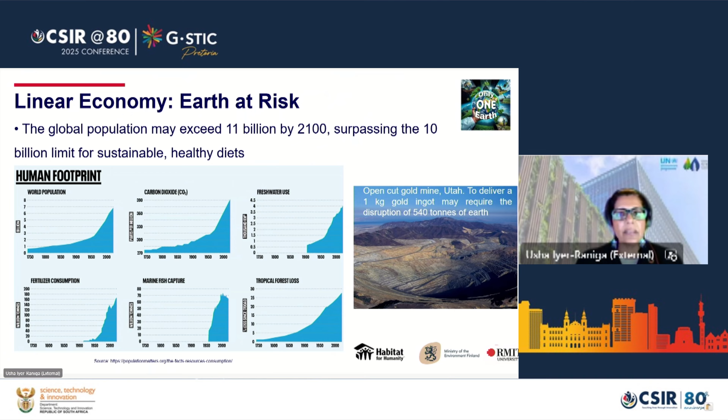So moving along, as I said, we are living well beyond the means of our planet, and we know already that from about 1970, we have crossed the limit of the sufficiency of the one planet, and at least here in the Australian context, we go through this overshoot day around the middle of the year.

We need to start thinking about how the whole world is going to be able to live in a just manner, with equity across the world. It's not possible for us to continue to live in the same lifestyles that Australians do, which is looking for about 7 planets, and that's just simply not possible.

There's a little bit of work going on in terms of how some of that waste could be reused. We call that the recycling economy, but truly in a circular economy, there is no such thing as waste. We continue to use resources over and over and over again. And there are other ways in which that could be expressed.

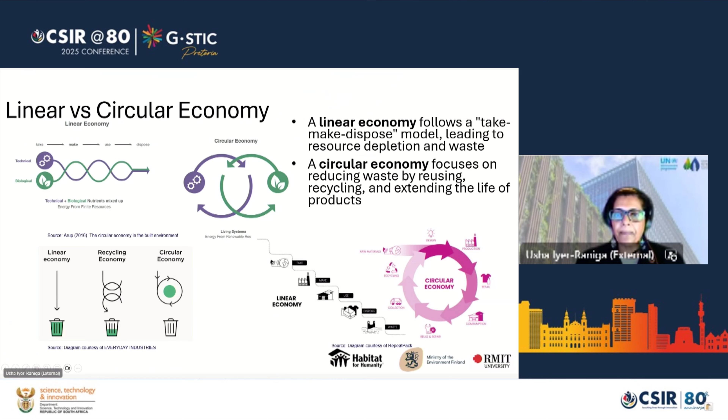The most common definition, or the most popular understanding, like the Brundtland definition of sustainability, is the one by the Ellen MacArthur Foundation called the butterfly diagram, which demonstrates on the left-hand side, in the green, the biological cycle, and on the right-hand side, the technical cycle.

As it is in nature, biological cycles can be continuously used, and it allows the planet to regenerate. Whereas with the technical cycle, that is not possible over a short period of time. You're looking at hundreds and hundreds of years for technical cycles to be able to regenerate on the planet.

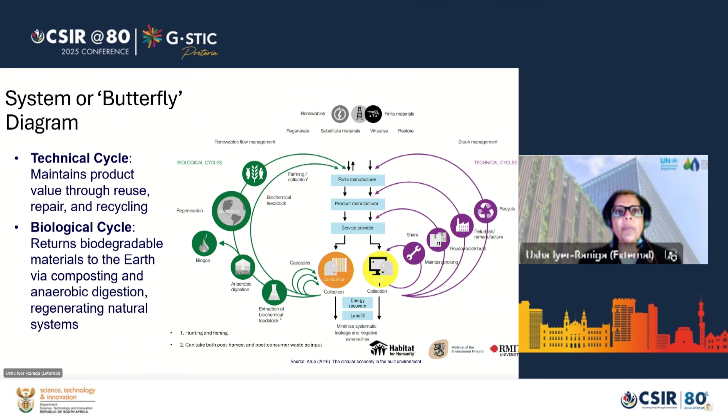And that, again, is from the perspective of the fact that we have already overshot our use of resources on the planet, and with an increasing population, this is simply just not possible in the near future.

What is really critical to understand is, unlike sustainability, where the environmental movement drove the solutions, and the economic aspect came in much later, and the social even later than that, in the case of the circular economy, it's unashamedly looking at how we can allow the planet to regenerate while bringing in solutions that also provide economic incentives, with economy as the basis for making these decisions.

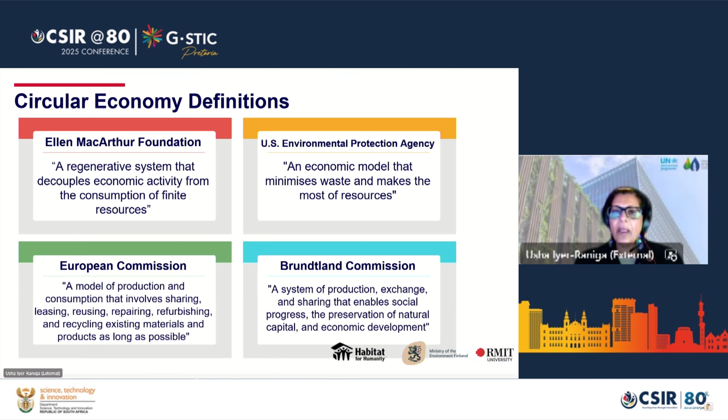So what are some of the themes we need to consider when we start talking about the circular economy? Some of these themes include the importance of the design perspective, because we need to create systems so that we don't have waste anymore.

That will allow the earth to regenerate, particularly if we start thinking about more bio-based materials and bio-based products. We need to think about how we optimize resources, how we can make things more efficient, what these inputs are, where we get them, and where these outputs actually end up. How do we maintain utility for systems? It's about shifting from just the cost of a product into its value, and cultivating a repair movement so products can last much longer, while ensuring we bring renewable energy into the mix.

So from my perspective, the circular economy is actually a subset of sustainability. It sits very much as part of sustainability within the economic lens of how we can reach triple bottom line sustainability.

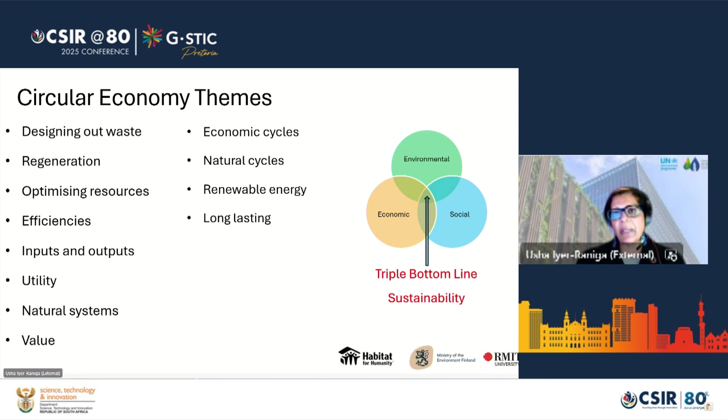So thinking about the design of products, and how we make things last longer - think about your phones or laptops or anything you might be buying. We've now moved into a linear economy where we buy things, and when they don't work, we throw them away. In some countries, certainly in Africa, parts of Asia, Latin America, the throwaway culture is not yet prevalent, but we're heading there, as people across the world want to live the same lifestyle as Americans and Australians, cultivating more of that throwaway culture.

So we need to think about what we use to make these products, and how we make them with more use of renewable energy. Instead of owning products, can we start thinking about a product-as-a-service model? Uber, for example, is a good model of this - you don't own a car, but you want to be mobile, so you use Uber as a service to move from one place to another. In the same way, thinking about the use of products, we can extend their lifetimes to reduce pollution, and so on.

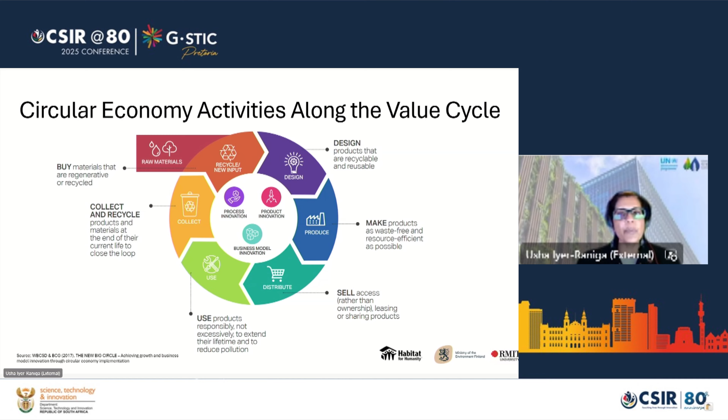So now thinking about it from a built environment perspective, which is really the focus of my talk - how does that resonate within the built environment, and how do we look at buildings from that circular perspective? There are a number of different definitions of what a circular building is, but really what a circular building does is look at how we can optimize resources throughout the life cycle of a building.

So again, the design of the building becomes really critical. As you can see on the right-hand side in the purple, light blue and blue, we need to start thinking about materiality, and how we use these materials for as long as possible - once buildings are built, how do we ensure they stay for much longer? How do we change the function of buildings, and retain them for different uses over time? How can buildings actually become material banks?

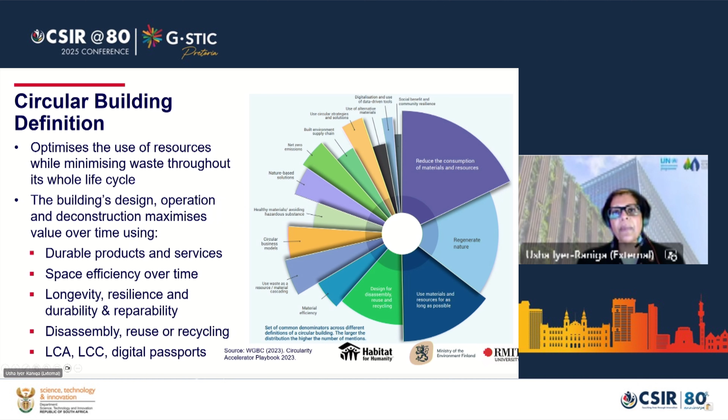How do we use spaces more efficiently within buildings? And if these buildings become material banks in the future, how can they equally be deconstructed, not just constructed? What are the tools that can help us along this journey - things like material passports or digital passports within buildings?

So what are those principles that we use in the built environment? Essentially, there are three, and it doesn't matter whether it's the built environment or anything else we're thinking about from a circular perspective: we want to conserve resources and increase efficiency as much as possible, we want to design so we eliminate waste completely, and we retain value as much as we can. There are different ways in which this can be done.

For instance, you minimize the use of virgin materials, you use more of the materials that are already in the marketplace. You try and ensure that the types of materials used in buildings are bio-based, such as bamboo, mud brick, and clay bricks. These are some of the materials that can be used.

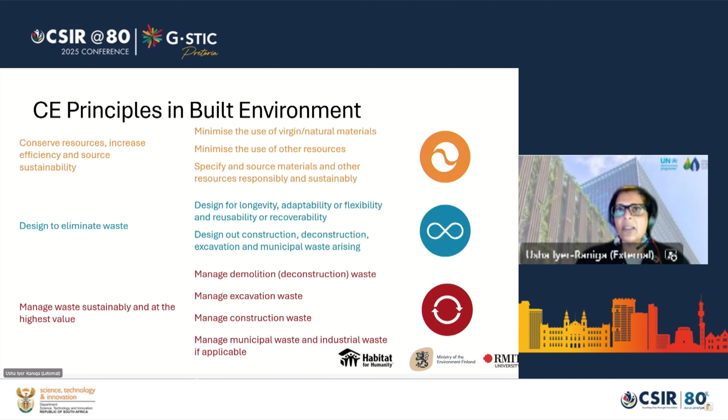How do we ensure that they remain in the building for a much longer period of time? And how do we ensure that we don't demolish buildings, but actually deconstruct them? Because if we demolish it, we're crushing it, and we're not able to reuse those materials again. So how do we manage construction waste? Peppered within all of this are things associated with policy, regulation, standards, and certification.

So when we talk about circularity, in that context of circularity and sustainability, we often also talk about net zero. So what does net zero actually mean in the context of the built environment?

Without going into too much detail, I want you to focus on the left-hand side, which is looking at whole life carbon. Whole life carbon includes the operational carbon as well as the embodied carbon. And in order to be able to reduce this embodied carbon, on the extreme right-hand side of this graph, you want to try and reduce the amount of embodied carbon in the building.

That's what we're trying to do in this line here, where you've got reduced embodied carbon. And you want to try and compensate as much as possible in terms of the operational carbon by other ways, such as using renewable energy in buildings or creating net positive value in buildings as much as possible.

So you actually move - and this is really where we are at now - building codes and standards have moved into energy efficiency, but moving beyond energy efficiency into nearly net zero, so that if you cannot produce that energy on site, you can actually draw that energy in from other places.

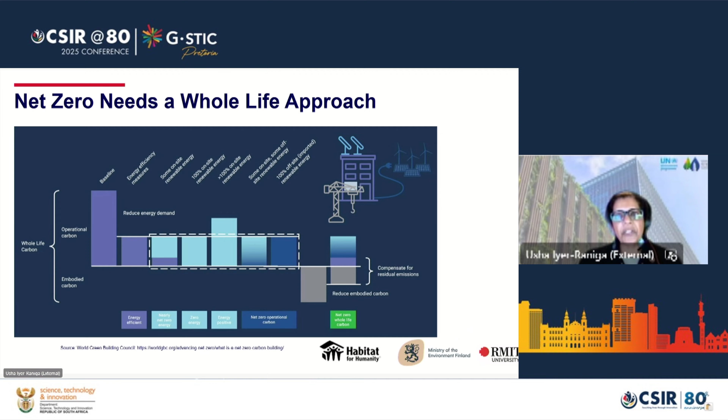But if you're producing more energy on site, you can actually sell that off or give it to other places. So the end game is really getting to net zero in terms of both operational carbon as well as embodied carbon. And things like offsets, etc., also come into the picture.

It's also important to think about who are the different players when we talk about the built environment. In the work I've been doing with the Materials Hub of the Global Alliance for Buildings and Construction, we have been looking at a range of different players: RMIT University, myself, the Ministry of Environment Finland, hosted by United Nations Environment Programme. We've also got NGOs such as Habitat for Humanity involved.

What we have been doing is looking at the work we have been doing since 2015 to 2022 in the One Planet Network's Sustainable Buildings and Construction Program, where we were the first global agency that looked at circularity in the buildings and construction sector.

We developed a number of reports. We mapped the state of play against the Sustainable Development Goals. And you can see on the right-hand side that we looked at things like the regulatory and the policy incentives.

Who are the commissioning agents that need to get involved, what is the role of the logistics operators - the people that transport and procure goods and services - and how do we ensure continuing education across all the parties involved, from planning, the people in the property market, the financing parties, as well as ensuring the client is well aware and puts circularity and sustainability central to their brief.

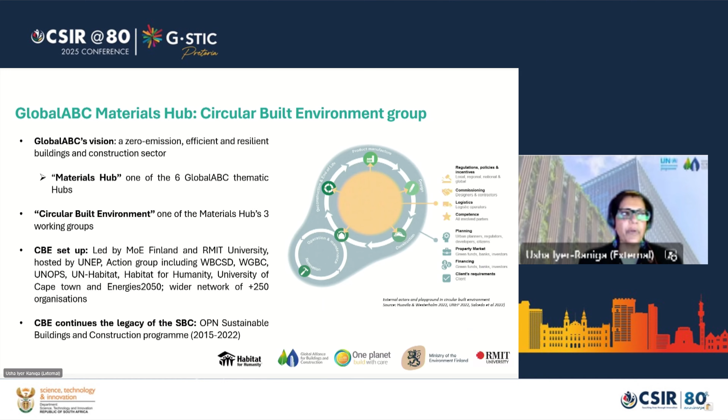The work we have been doing in the circular built environment work has continued since 2023. In a minute, I'll talk about some of the activities we have been doing, but essentially our role has been to try and increase awareness and buy-in.

And we do this in a number of different ways. We do webinars, we run events at the World Circular Economy Forum, we make presentations at the Conference of Parties meeting, we have been working on building capacities, and particularly the work I have been doing has been looking at and being part of an academic and research institution.

Building capacities is a very important aspect that I bring into the work I do with the Global Alliance, as well as informing technical work, the policy work, and the market work.

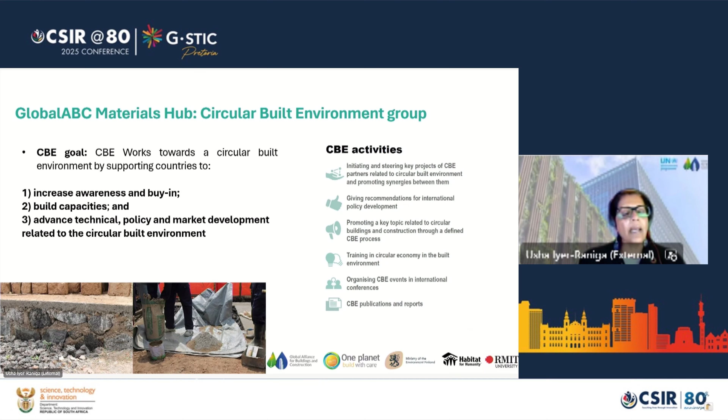So on the right-hand side, you can see examples of some of the activities and some of the areas that we have been working in to date.

Just very quickly, over the 24-25 period, we have been working very closely with some of the UN agencies, such as UNEP and UNOPS and UN Habitat, particularly UN Habitat that has been looking at affordable housing. We have been working very closely with the One Planet Network's Sustainable Procurement Program, because procurement is a very important aspect of the work that we do, and we recognize that.

I don't have a lot of time left, so I'm going to just focus on a couple of things and leave it there and perhaps pick up some more during the question and answer session.

But I just wanted to very quickly mention from a global policy perspective, we have had a very close role with the Buildings Breakthrough. So the Buildings Breakthrough agenda actually came up at COP26 in Glasgow, where the role of the built environment was recognized as being very critical to decarbonize.

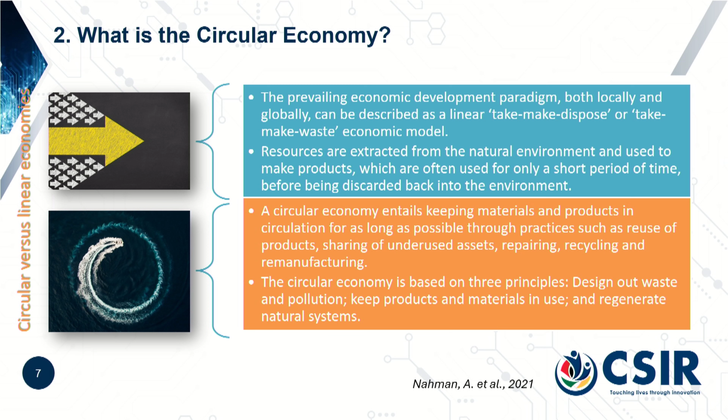I won't go through the definitions again, but the linear versus the circular economy - I am going to come back and challenge a little bit of how practical that is, but it's certainly the base and the thinking that we were working off. And I think our first speaker this morning already did a wonderful set of definitions and depth in the definitions that were presented just now.

So there's a great aspiration towards smart cities, smart African cities, technology solutions, and there is an overlap between the thinking, but they don't always pull in the same direction. The smart cities movement and aspiration doesn't always pull in the same direction as the circular economy, or circular city, type of thinking.

And we've done a lot of work in both areas, and I think we need to be pulling these things together around, and also more productive cities, inclusive cities - we're all trying to achieve various things. They don't always add up, but we need to be speaking to each other about what is a functional, equitable, just urban system within a very rapidly urbanizing continent. And that's at the base of a lot of what we're talking about here.

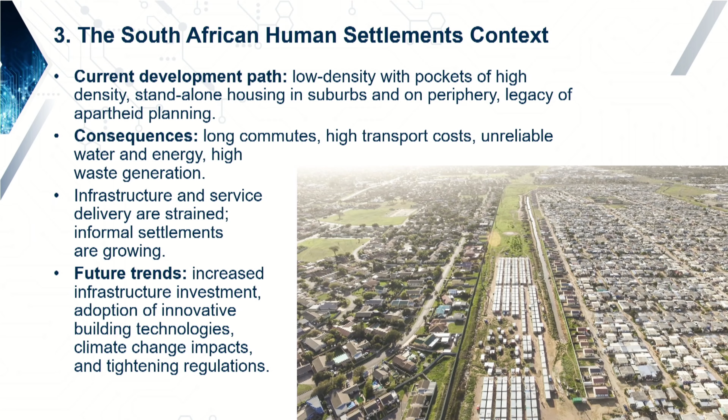But we need to look at these much more systemic and fundamental changes in both the urban form and in the incentives to change the urban form, but also in the infrastructure and the technologies that will help us build more functional and resilient and less wasteful settlements and cities.

So what we did first is we just looked at some of the typical, and I think there was a slide in the previous presentation as well, but these were some of the typical human settlement related interventions that you can look at to make a difference. So we started off with 17 in the group that we were working.

The ones with little asterisks are the ones that we then chose to take further. So things like the 15-minute neighborhood, design for disassembly, etc. You can read them on the screen. There's a lot of different possible circular economy interventions that can make a difference at different scales.

The last one, hadn't come across virtualization. That's a kind of a fancy word for just having sensors on site that allow you to monitor what's going on without having to always be there on site. But it's also sort of the smart sensors and digitalization side of things, if I'm understanding it correctly.

And you can see roof garden. So Jeremy, the first author, the late Jeremy Gibberd, he, as an architect, has tried to design and build and has built roof gardens in different parts of the world.

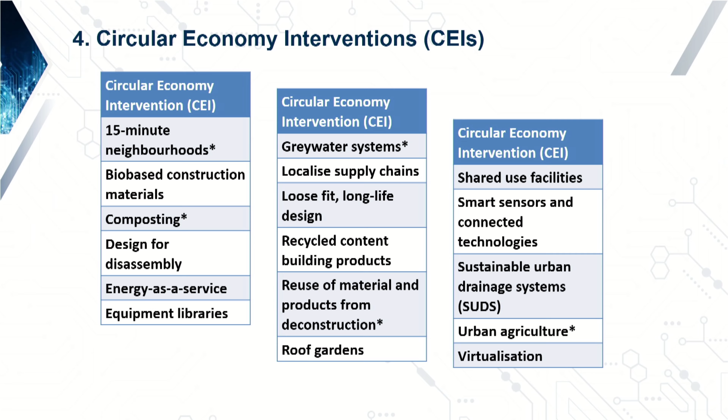The first problem as an architect is that your client says, but your roof is leaking. It's incredibly difficult, especially in a climate where there is torrential rain and even not just drizzle, but anything beyond drizzle, and also very harsh sunlight. And then what you're basically doing is you're putting a swimming pool on the top of every building.

So there were quite a few non-starters that we came up with, both from our experience, but we also chose ones which we thought could work and also that we had data for, and that we could go into this modeling exercise that I'll mention now.

So then the next stage, I won't go through this in detail, was just to have a survey and a set of focus groups with South African professionals and officials around who was familiar with some of these interventions, what did people think about which ones would work, which ones did people think that we had started in the country.

You'll see on that last line, the least familiar in people's minds locally was what is meant by loose fit, long life design. Equipment libraries were fairly unfamiliar to people. Design for disassembly was also not that familiar. So, there's a lot of these ideas that are well developed in certain societies, which are not that common here. And that's a good starting point, I think, for understanding where the opportunities are.

Right, so then what we did is we took those 5 and we did a whole modeling exercise: the 15-minute city, urban agriculture, composting, grey water, rainwater use, and reuse of building waste for reconstruction. And the modeling group that was in the author group used a lot of data, especially from the city of Johannesburg, to do an exercise. And there's a whole appendix to this paper which unpacks each of these and how they were modeled.

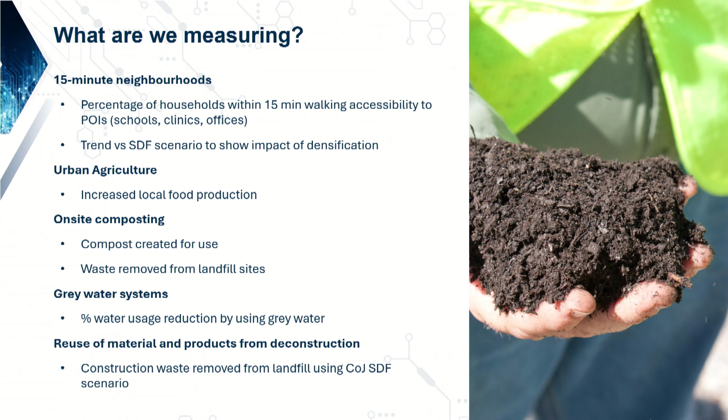So very quickly, the findings which are written up. This was taken through to 2042, is that you could make a difference to the number of households in Joburg, which was 1.84 million households. You would make a bit of a difference at the moment if the spatial development framework of the city of Johannesburg, which is quite progressive, was actually put into practice, with strong elements of densification and provision of different facilities. You could make a difference in the lives of 100,000 households, but if you extended that to a 30-minute neighborhood, then it's 300,000 households, which is significant. There's a bit of change there.

What I would argue from some of our previous research is that a lot of township neighborhoods, historical townships as we would refer to them, is already walkable. Every third household that we surveyed in Mamelodi is a home-based enterprise. You've got spaza shops, traditional healers, hair salons, car mechanics. So when we talk about the formal walkable city, we talk about land use and official zoning, which definitely has to change. But informally, there's a lot of facilities already embedded within communities.

Urban agriculture, we could feed 20% of Gauteng's population using all the open space. The downside is you'd have to use a lot of your grasslands and forest lands to do that. So where on the one side you might be able to produce 20% within a very urban space, you've got to look at how you do that.

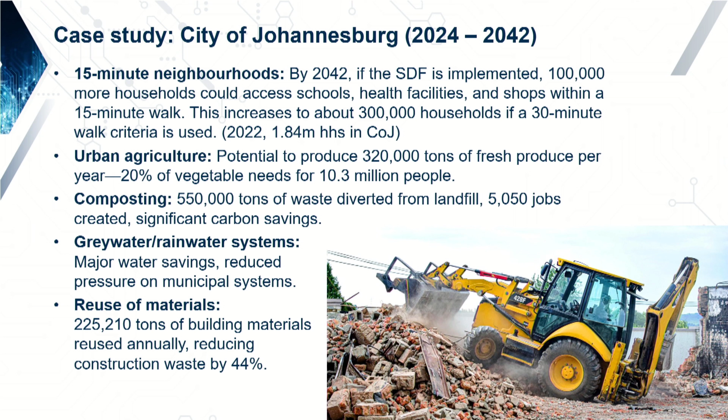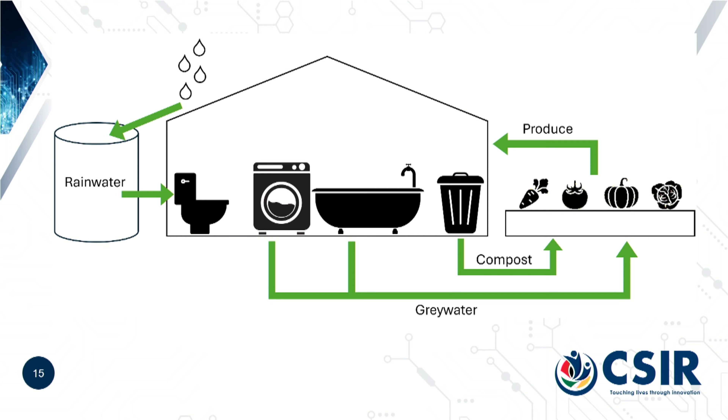Anyway, let me start to just finish off, but that would be just a typical sort of plot-based set of recycling and circularity. But as people like Coralie will tell you, some of these things are done more efficiently at a level up. Groups of households being able to do this at more than just one household level, and also then using some of the surrounding open spaces.

Right, so now coming to beyond the paper, the critique in my mind. Well, this was in my mind, and then I put in a very clever prompt to ChatGPT, and ChatGPT gave me much more eloquent ways of saying this. So circular economy thinking can be seen as techno-optimistic. If we put this technology solution in, it will make all this difference. And in our modeling, because it was on paper, we had to be optimistic about the kinds of scale of change it could make. So it was an exercise. It didn't mean we were saying this could be done, or how difficult or easy it would be to do it. So I think that's one thing.

It can fall into this displacement and scale challenges. If you make advances in one sort of spatial area, you might be displacing that to another area, and then the net gain may not be quite what you're looking for. I think we're all familiar with this kind of critique.

Sociocultural dimensions, I mentioned, for instance, the use of grey water. Certainly composting toilets is acceptable in certain parts of the country and not in other parts. So again, those sociocultural dimensions are very important to consider. And then underestimating the political economy, the existing vested interests. Try and change the cement industry quickly, or the clay brick industry, fired brick industry. We were talking about this in 1985 when I was a student.

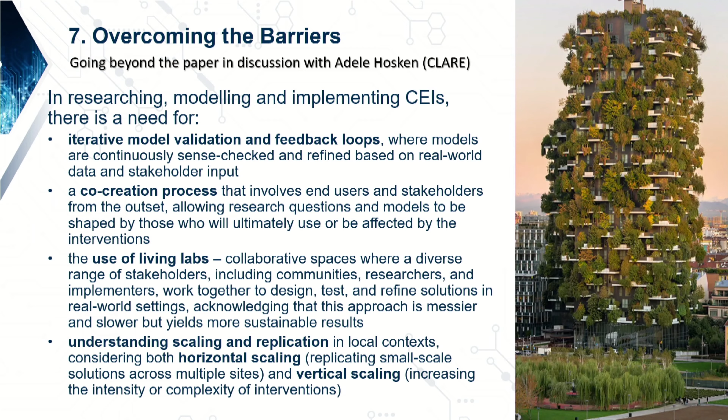So you don't get right to the end of the project with an informal settlement grey water project where people use their grey water into an open channel down to a tree. And as soon as you start building it, the community, this is what happened in Cape Town, says, no, we can't do that. You start that much earlier. I'm just using this as an example. I know it's contested, but these are some of the considerations.

Living labs, where again you put the stakeholders together to actually experiment. And then especially understanding scaling. So we tend to look at horizontal scale, but you can also look at the vertical scale either physically or in terms of densities. So vertical urban agriculture, not just horizontal agriculture.

And I think that's it. I'm not going to go through, we had recommendations. They're not too important, but basically let's look at all of these things in more detail. We think it can make a difference to human settlements in the country. And then we do pose the question, informal settlements are seen as visible examples of where the challenges are, but actually it's often about the underlying rights to land and the right to adequate housing that can keep on driving this pattern. I'm going to just end with that one.

We just started or launched a G-STIC product, which is an online repository of alternative technologies. So a lot of these things you'll find on that site. It's brand new, so there's not a lot there. So if you have any circular economy technologies, please upload them on the site. Thank you.

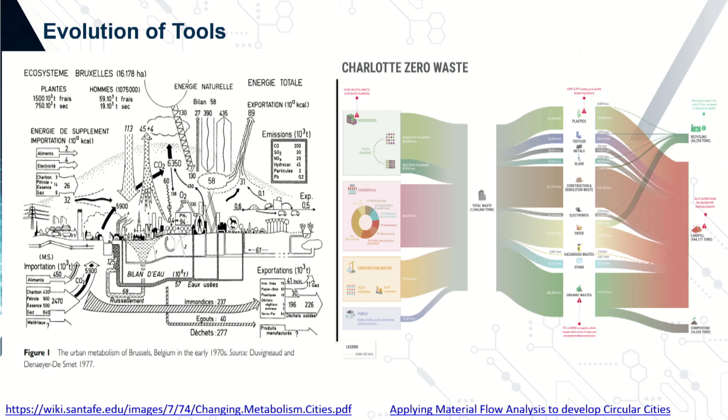Perhaps important to mention at this stage is that this is a result of a material flow analysis. It's termed a Sankey diagram, and what a Sankey diagram is, the width of an arrow or a flow is indicative of the quantity of the flow flowing through that particular stream - sorry, lots of flows there.

This is what came out from a study related to Cape Town, and this is a comparative graph that came at the end of it. What is important to note here is, despite Cape Town being a harbor city, it contrasts actually in the order of 2 to 3 times difference between Cape Town and Paris, and you can see this in the imports and exports. And then if we look at DMC, you can see that the contrast is actually even greater.

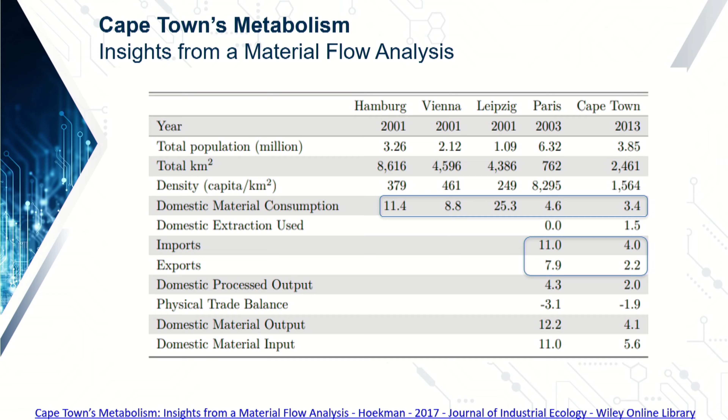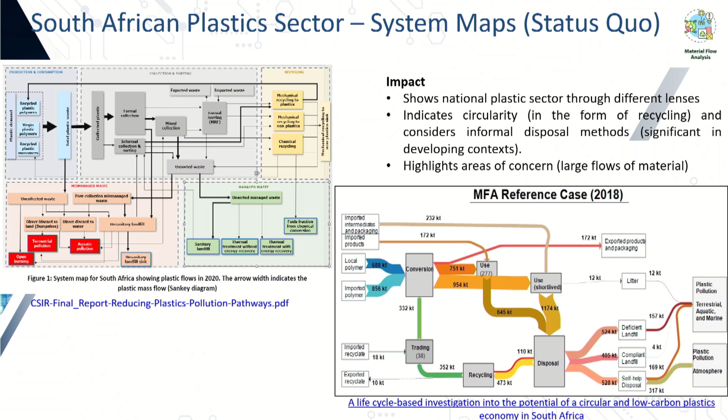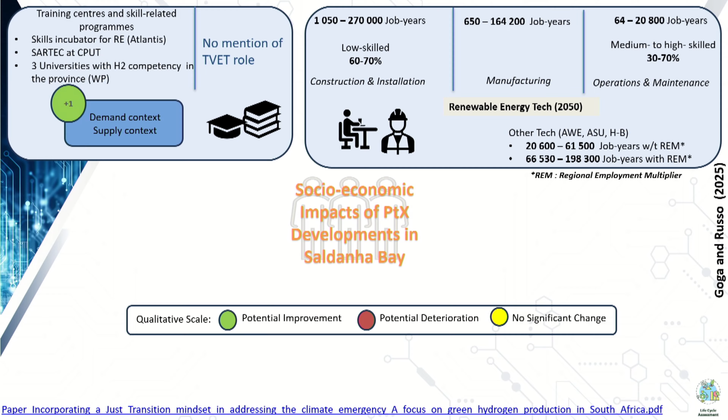On the jobs aspect, there are quite a few numbers, but the one I wanted to highlight was the link between jobs and skills: in the temporary commissioning phase, construction and installation, we foresee the majority being low-skilled employees, whereas in the maintenance and operations phase, we predict people would require a higher skill set and additional qualifications.

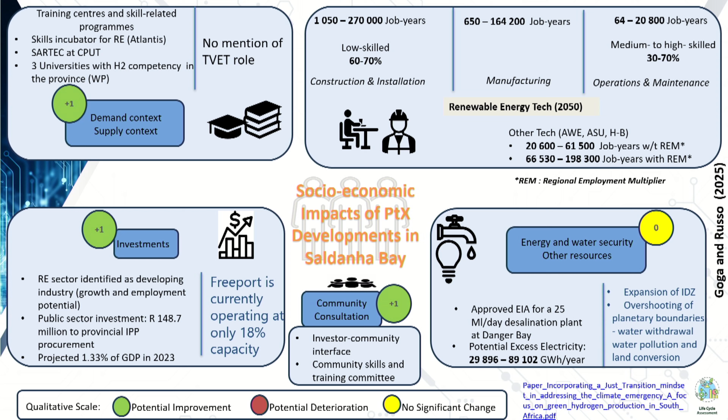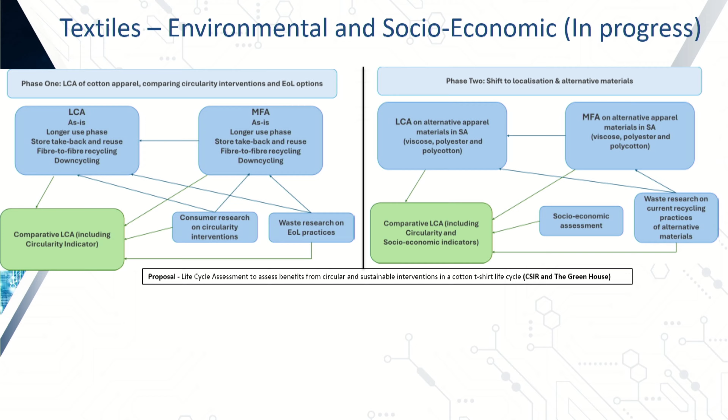In phase one, we want to look at a couple of different interventions, and this should speak to everyone who enjoys shopping - the fact of what would happen if you had a longer use of a particular clothing item. I'm sure some of you are familiar with certain store buyback initiatives where you can bring your clothes back and get a discount on your next purchase. What impact would that have?

So we've done a little bit on cities, a bit more on sectors, and I just want to highlight how industrial ecology plays a role for national circularity opportunities. Really quickly, there was a UN NDC toolbox that was developed, and the intention of this was to identify the biggest and greatest opportunities for material circularity, contributing towards the reduction of GHG emissions.

Surprisingly, at least for me, the most promising sector came out as building construction and civil engineering. Eight circular economy interventions were identified. The model said it has the capacity and capability to actually reduce current emissions by half. And then there are also some socioeconomic and adaptation co-benefits.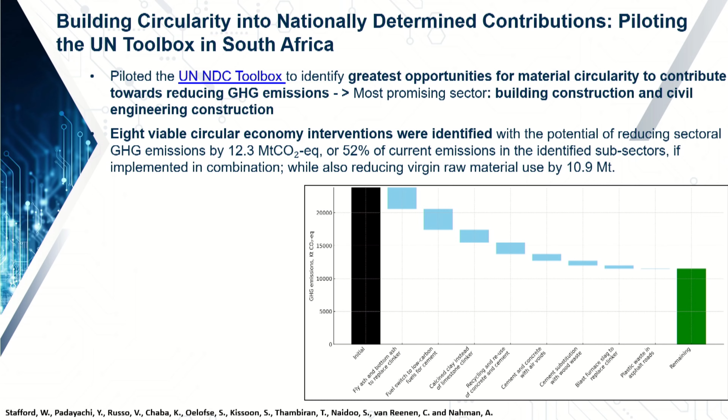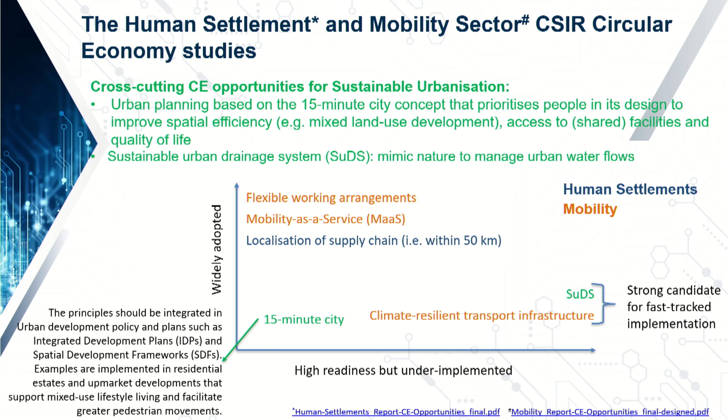I think the previous speaker has done a brilliant and fantastic job presenting the report. What I wanted to mention is that my colleague has graphically represented some of the circular economy initiatives, and she's mapped it according to how widely adopted a particular initiative can be, and then in terms of its readiness state, and how it's implemented, or how it could be implemented.

Last slide: what is happening in South Africa as a whole, as a result of a material flow analysis undertaken by UCT and the University of Vienna. In terms of key findings, we can see that the economy is fairly linear, powered by fossil fuels in particular, with really low stock or build-up of stock, comparative to other developing and developed countries. So in terms of our roads and buildings, relatively low stock of that.

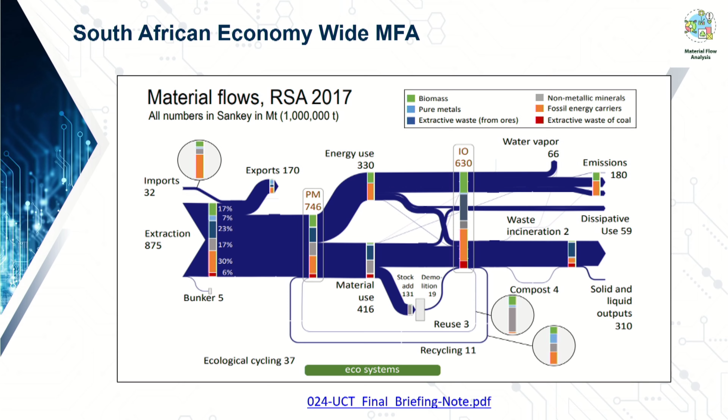However, the good news is that there are pockets of circularity, and there is a significant amount of informal activity happening with respect to reuse and recycling.

Some conclusions and key messages from my presentation: the fact that we know there are a wide range of environmental risks prevalent in cities. I hope I've demonstrated that industrial ecology tools can be used to analyze this relationship between industrial processes, urban systems, but also taking unique socioeconomic aspects into account.

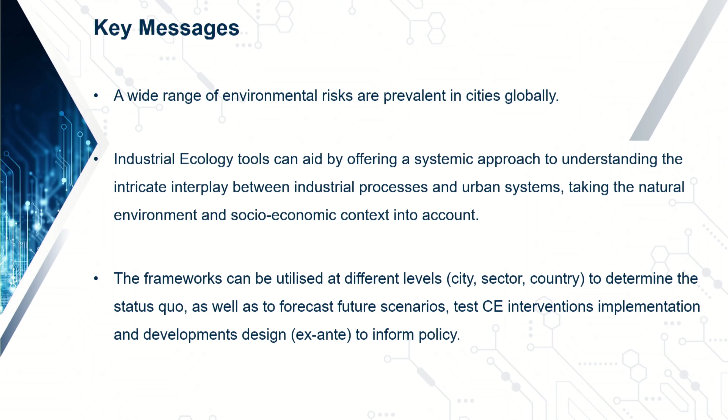And then lastly, the fact that these frameworks can be used at the city level, but then they can go a step further. They can be used in sectors and countries to determine not just what is currently happening in terms of a reference case or business-as-usual case, but actually do some sort of prospective modeling and forecasting by testing circular economy interventions. This is with the end objective of actually informing policy and legislation. Thank you very much.

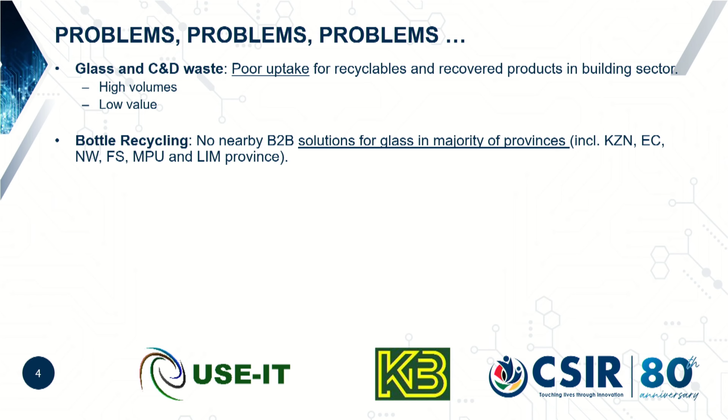So glass and construction and demolition waste, there's very poor uptake in the building construction sector. Bottle-to-bottle recycling is not widespread throughout the country. We have 2 plants in Johannesburg and 1 in the Western Cape—that's 2 provinces in South Africa. What happens in the rest of the country, the other 7 provinces?

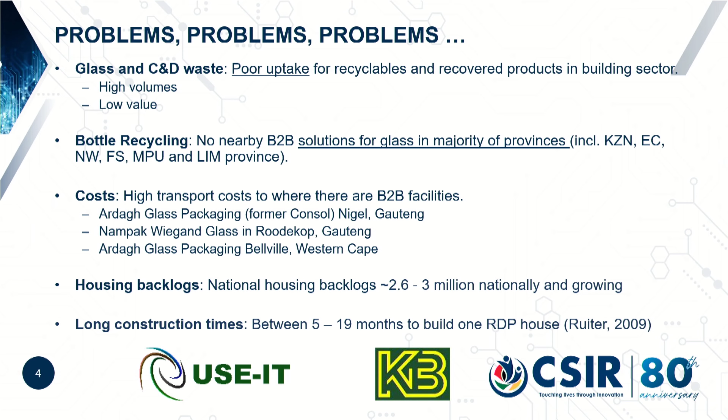We have national backlogs approaching 2.6 million to 3 million households. We've got long construction times.

So we partnered in a 3-way partnership with the CSIR, an engineering company, and an SMME incubator. The engineer had a technology that he wanted to introduce to market, and he approached the SMME incubator. We basically said to him, have you considered the circular economy potential of the technology?

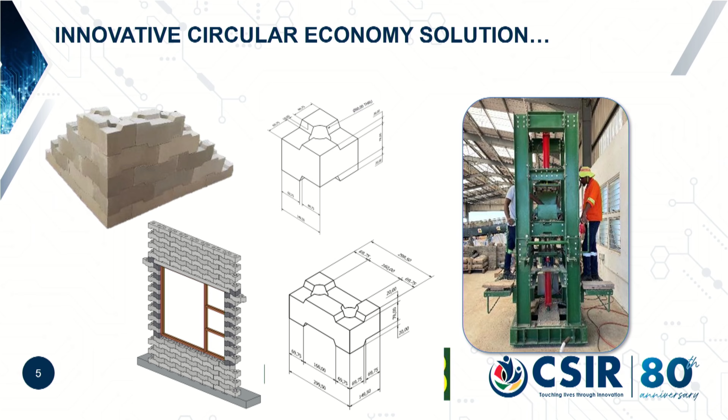The equipment on the right-hand side, the big green monster you can see there, that's the heart of the project. The project was made up of 3 partners: the CSIR, who had overall oversight of the project; Keybricks, who developed the technology; and USE-IT, who drove the SMME incubation.

So where was the circular intervention we proposed to the engineer? This isn't a critique of engineers, it's just that we sometimes think in our silos. We proposed that we tweak the machine to demonstrate designing out waste. That was already factored into the project, because the blocks fit together with interlocking surfaces—virtually like putting together a jigsaw puzzle to build your house.

We also proposed that we incorporate glass and construction demolition waste. The technology we utilized, due to the design of the block and primarily the interlocking facets, was small scale, low tech, and had a very high ease of replication—with some basic training, somebody off the street with no previous background in construction could use it.

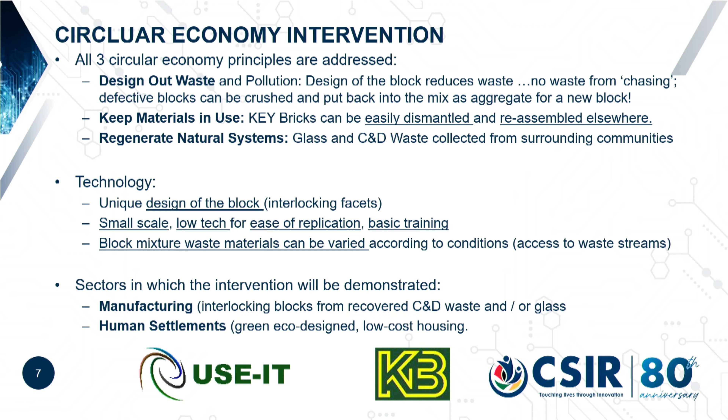Some other benefits: jobs at different stages, both direct and indirect. You'd collect your materials from communities—it could be done with the informal sector as well—and you'd have a return to construction of not virgin material, but materials which could be incorporated into the block.

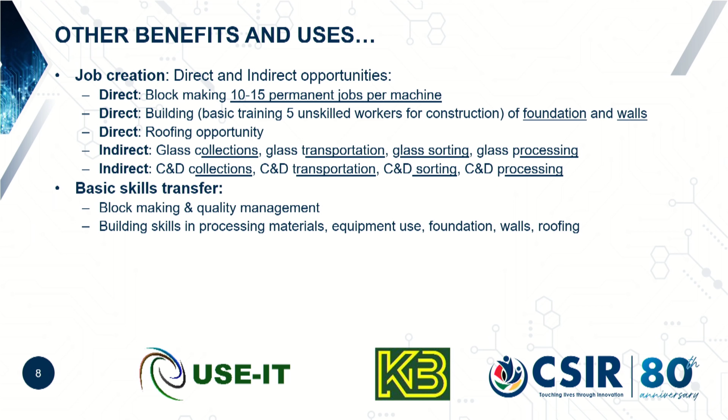Basic skills transfer in terms of how to utilize the machine, how to lay out the blocks, and planning the layout of rooms on a structure. Those were opportunities on the project.

And most of the equipment was actually mobile, so it could be deployed to illegal dumping hotspots where you have high volumes of waste products.

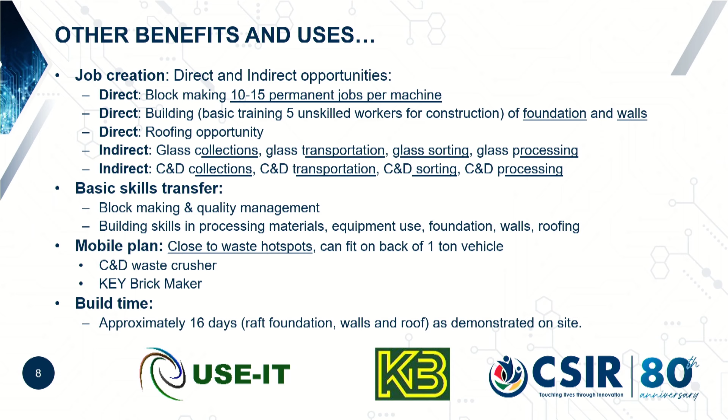The total build time was 16 days. You put in your foundation, your floating raft foundation, 4 days for that to cure, and then you put in your walls, and then your roof. Altogether, we achieved a construction time of 16 days.

Other benefits of the project? We actually used the bricks as pavers on site, for pathways and route connectors, as you can see in the photograph.

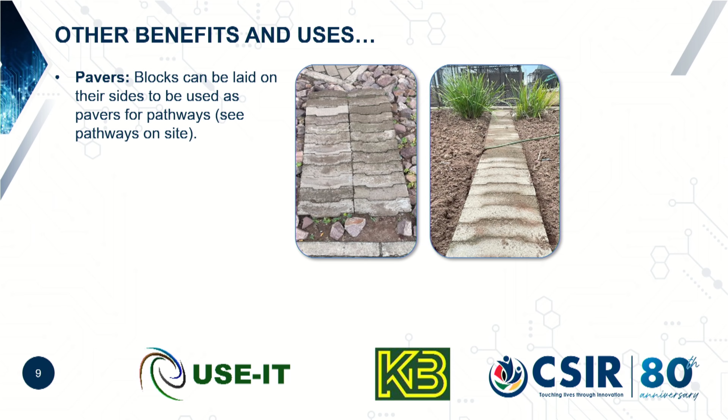Another benefit was that, due to the fact that the interlocking block had two voids within it, you could then introduce rebar into each of the voids if you needed additional support or retaining strength. That can be seen in the last photograph.

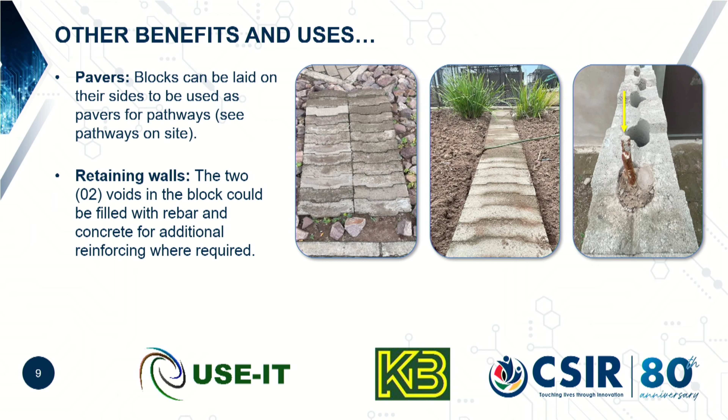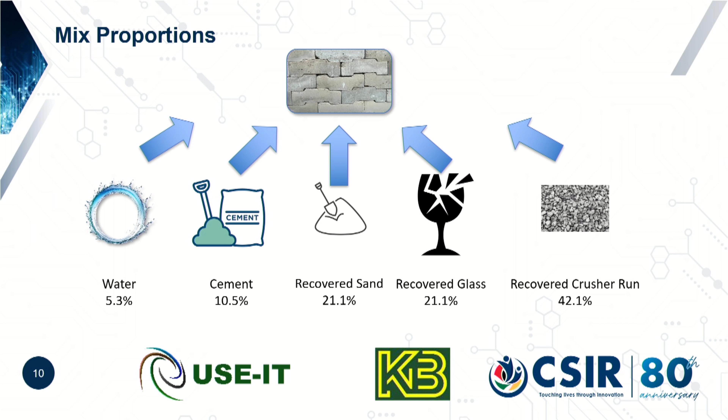So in terms of mix proportions, that's your mix proportions with your recovered crusher run forming the largest component. Other recovered proportions include recovered glass and recovered sand.

The total project duration is 3 years. We're in year 2 now, just coming to the end of year 2 of 3.

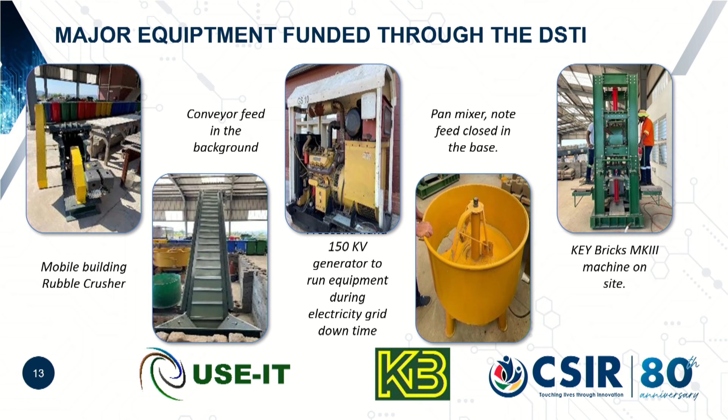I'm not going to spend too much time on this slide. It's just the equipment that we had on site, and that was also fabricated. Some of it was fabricated as well, some of the smaller equipment as well.

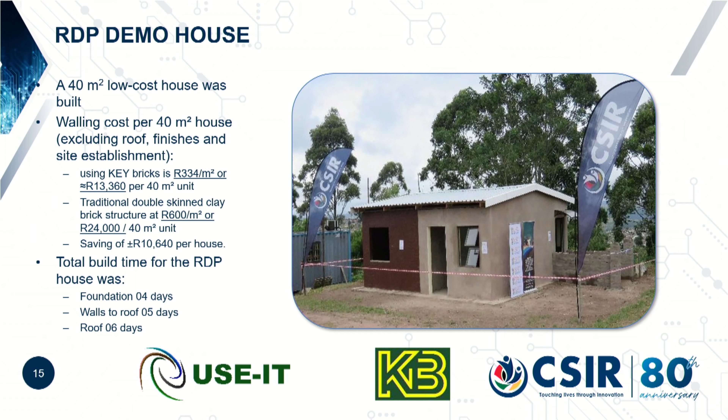That's just a breakdown of the total days per stage.

We were very lucky in that there was some offtake on site. The project was hosted at Hammarsdale Waste Beneficiation Center in KwaZulu-Natal, and on site they have a number of demonstration projects. We were very lucky in the sense that Hammarsdale received funding to construct a 2,000 square meter e-waste sorting facility that utilized about 11,000 blocks. So we had some offtake of the product into market.

That's just an in-process photo of the construction of the e-waste facility, which was a collaboration between Use-it, eWASA, and of course the Key Bricks project. Total cost for the structure was about 4 million Rand, and the structure utilized 11,000 bricks. And that's the finished structure that we put together.

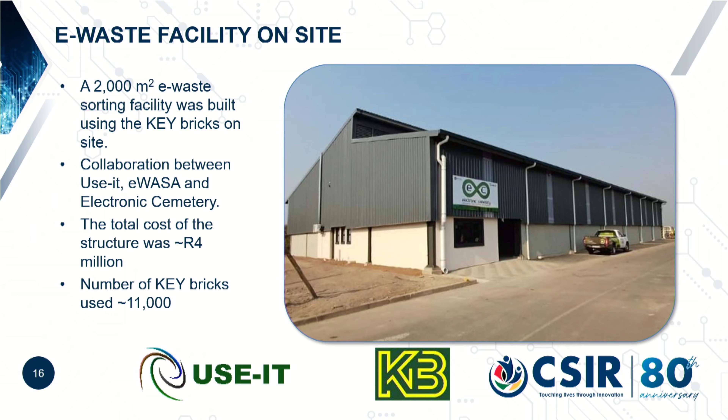Just an indication of some of our project indicators. So we measured block making, and we measured waste diverted from landfill site.

From start to present day, we calculated about 25 tons of F1 glass, fraction 1 glass, that we utilized in the block, which was recovered, which is equivalent to about 7 African elephants.

Sand recovered from site and other sources as well was basically about 26 tons.

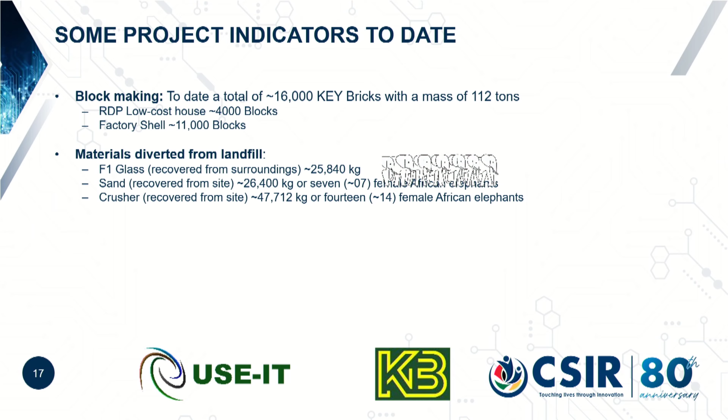Crusher material, the largest fraction, was about 47 tons approximately, or 14 African elephants. Sorry, my elephants, there wasn't enough space for my elephants on the screen, so I had to overlap them.

We've had a lot of traffic on site, private sector. We've had various government departments, we've had national government. There's a lot of interest in the project.

To date, trained individuals working on the project able to make blocks, we had about 23 individuals. And to date, we've created 2 SMMEs on the project.

Some of the challenges that we've experienced: we're currently experiencing a huge delay in terms of getting our certification for Agrément for the block to enter the commercial market, and this is a huge problem. I can't understand how an innovative SMME in the South African landscape can wait for, what is it now, we're at 1.5 years, almost 2 years into the project, and all we've received from Agrément is a file number. We were communicated with right at the beginning when we sent through the application, and we were advised that the process should take no longer than 6 months. It's 1.5, 2 years, and all we have is a project number, file number from Agrément, which is very, very discouraging.

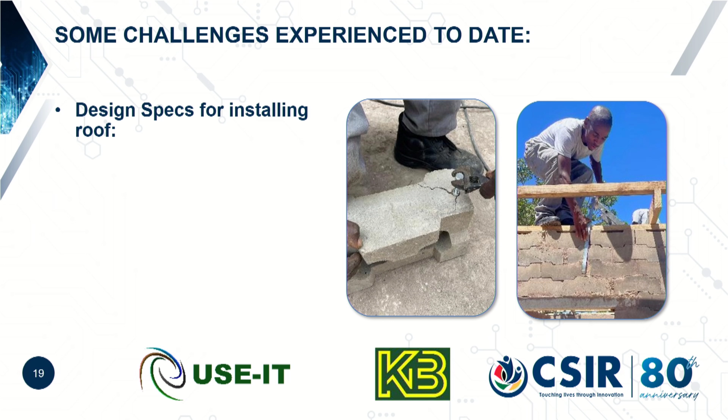Our engineer was around the back, and there was all this hullabaloo about the blocks being terrible, etc. So the engineer came down and said, well, hang on a second, why are you putting in an expanding rawl bolt? Just put in a normal plastic plug. So we figured out a couple of solutions for some of these problems, and we had some workarounds as well. Eventually we managed to get the roof on.

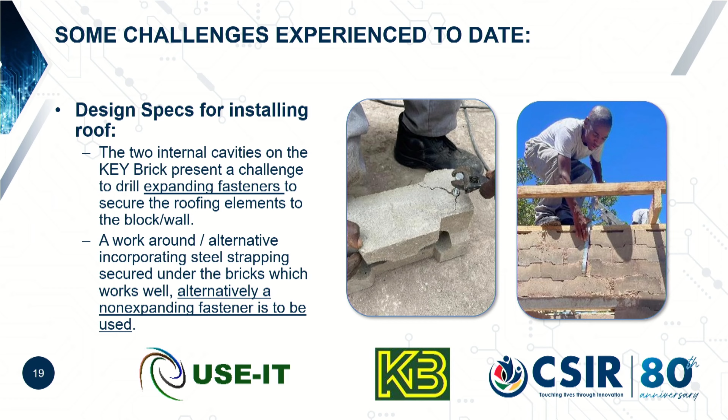Thank you very much, ladies and gentlemen. That's the end of my presentation. Many thanks.